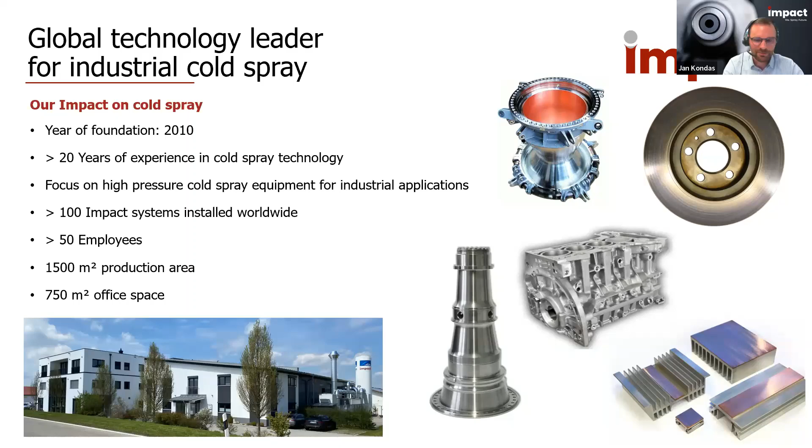So let me first shortly introduce Impact Innovation. For those who don't know our company, we are a German cold spray equipment manufacturer focusing on high pressure cold spray systems for industrial application. The company was founded in 2010, but many of the employees have longer, more than 20 years experience with cold spray. We've installed more than 100 cold spray systems worldwide. Our headquarters is located about 60 kilometers east from Munich in Germany, with around 1,500 square meters of production area and 750 square meters of office space, where more than 50 people work daily on design, manufacturing of cold spray equipment, research and development, and application development for different cold spray applications.

From the more than 100 cold spray systems sold worldwide, about 50% are located in Europe, about a quarter in North America, and about a quarter in the Asia Pacific region. Most of the cold spray systems sold recently are used in industry, but there are still many systems sold in the past which are installed at industrial research or academic facilities. The main fields of impact cold spray system utilization are automotive industry, aerospace and space industry, electrical components, and household products, specifically inductive coatings or cookware.

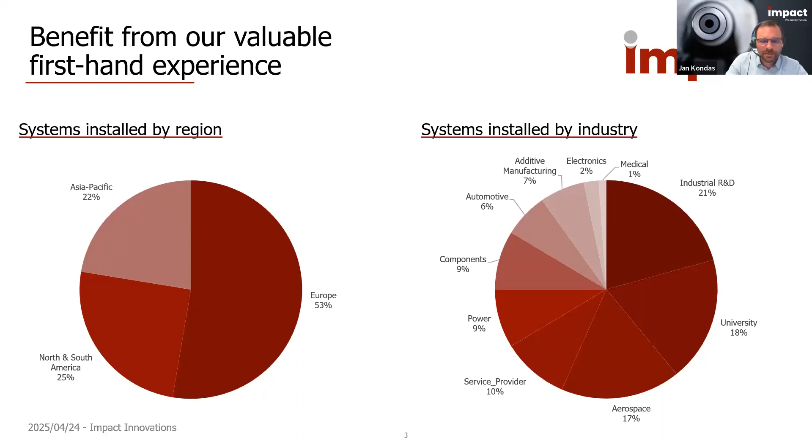Our in-house R&D facility, the spray laboratory, has more than 10 years of intensive experience in application development and material research. We have experience with a wide range of materials, most of which you can see in the table on the slide, but there are several others. We have experience with many alloys, metals, polymers, and some ceramics. You can see also a few photos from our material characterization laboratory and the spray lab.

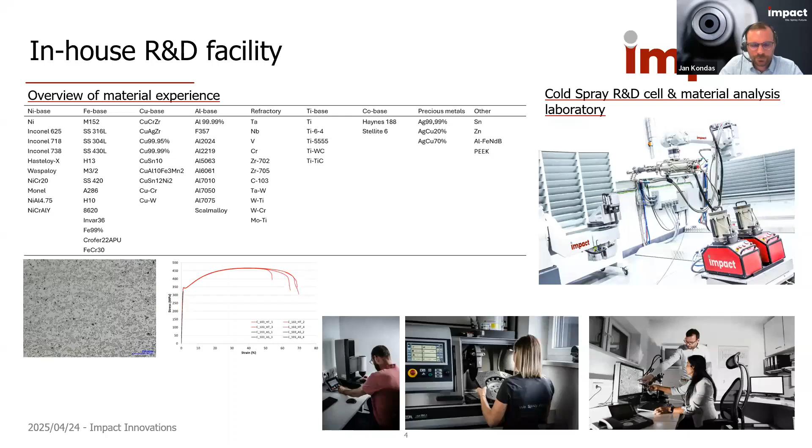First, I would like to introduce our EvoCSII cold spray system, which is a modular high-pressure cold spray system with a system architecture meeting the highest industrial standards. It is also convertible to a portable version together with the portable adapter, enabling operations at places with limited accessibility.

As Jan already said, in the new EvoCSII system generation, which we introduced in 2020, we are trying to follow a clear system architecture where we have a modular and flexible solution, especially for industrial use of 24/7 operation.

We have in this system a centralized control unit and gas management unit with a centralized control CPU. All external components like powder feeders, guns, water cooling units, powder heating, everything we call an external component, is connected to this centralized control unit, because we want to control all the external components from one control software and from one control CPU.

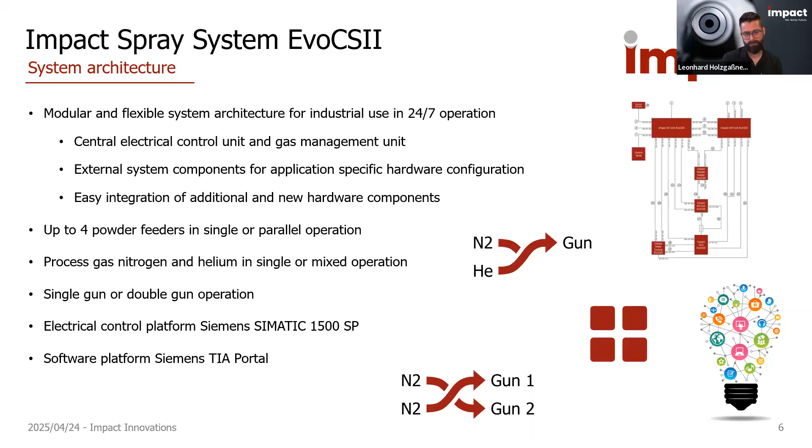We have just now introduced our new operating software called EvoOS, where we try to implement all the new standards necessary to fulfill all the requirements of the new IoT requirements. That means we have a central software to control all the components of the equipment, with an organic software architecture to integrate easily new upcoming software updates.

We have a very open interface to communicate with different other system components or automations. As I already said, we programmed this on a Siemens TIA Portal platform. And we have a new user interface, where we call it tile design, for a clear overview of all system components, with different component pop-ups where we have the detailed overview of the status of the different components.

At the moment we have 5 different operating modes, like manual control, external control, or recipe control. We have a centralized process value and process tolerance input. We have a very extensive monitoring system to monitor and control all the process parameters and the specific tolerances.

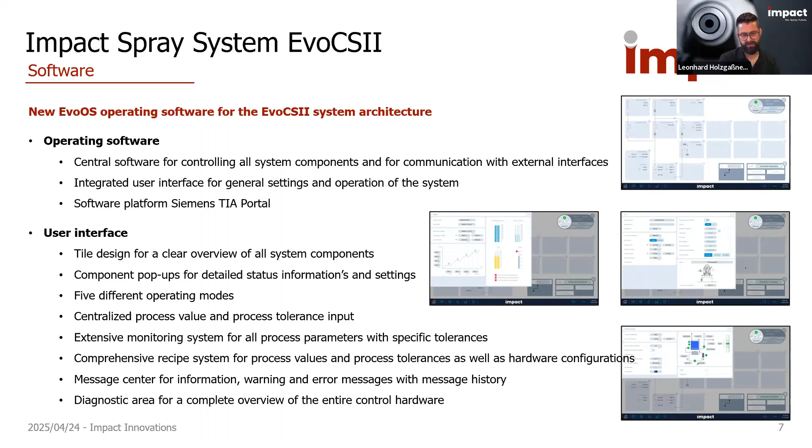I want to go a little bit more in detail on what we do with the process monitoring. First of all, we monitor every second more than 150 process values in a CSV file. That means we have a closed loop process control with all this data.

We can already offer preventive maintenance solutions, and we also invest a lot in machine learning to set up the full system for all the requirements of industrial 24/7 operation. What we have also implemented in this new software is cross-checking and the ratios between different process values, and if the ratio between the values is not in the right condition, we give the operator an alarm or a message.

The monitoring is carried out by specific defined tolerances, which can be set up in the recipe. With this we can also detect right from the beginning minor changes during production. That means we can already give quite early a message to the operator, for example, that in the next 1 or 2 hours you have to change the nozzle, or change something in the powder feeder.

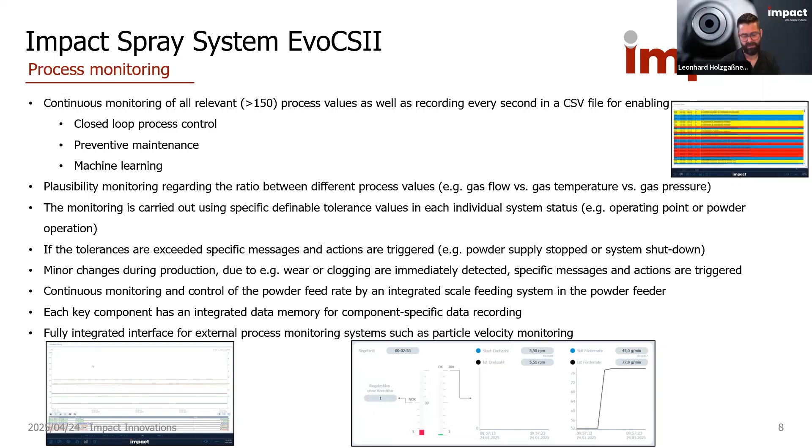On top of that, we have what we call a functional safety interface for safety-related integration into a high-level safety control system, like e-stop integration and enable signal integration. Then we have a seamless integration interface for external operation of the cold spray system by a high-level control production system. That means if you have a production line where you implement our cold spray equipment, you can fully control it by your higher-level control system.

As I said before, you have external recipe selection and external machine operation, transfer of system status and system messages. This is available for all common network protocols, for example Profinet, Profibus, Ethernet IP, CAN bus, everything that is available on the market.

As a third interface, we have an OPC-UA process data transfer interface. That means we can, in real time, transfer all the process relevant system parameters and data, for example to a SCADA system or to a server platform where I can then further process all this data.

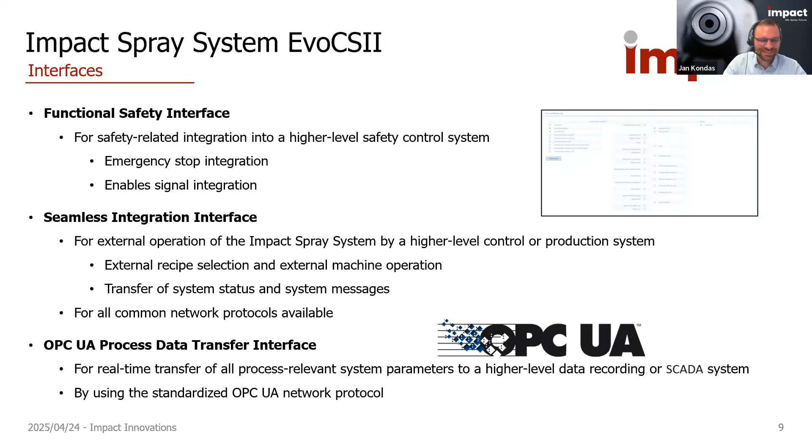I think, Jan, that's it, and I want to hand over. Thank you, Leo, thank you for the detailed explanation. I learned also something new from these few slides. I will not be as detailed in the next slides, I promise.

The Impact hybrid brake disc coating solution was selected as a preferred solution for the serial production of BMW M cars. So all BMW M cars in the future, I think starting from 2027, will have a coating on their brake discs from cold spray, from the Impact EvoCS systems.

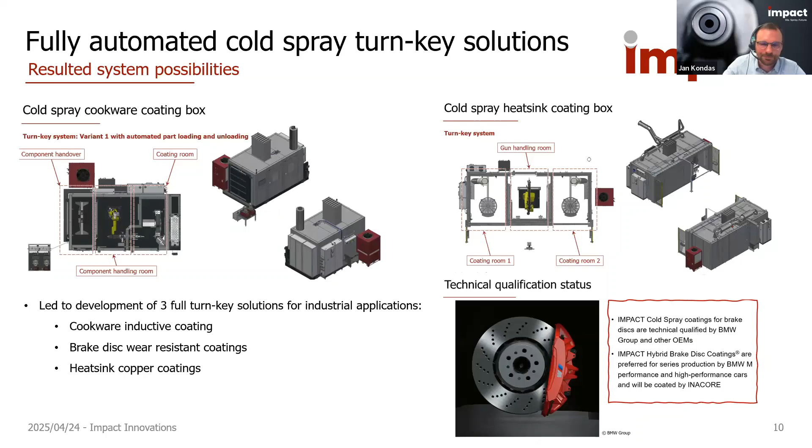As next, I will introduce our Impact cold spray gun family, which is the Impact Gun 5/8, the 6/11, and the 6/11 angle head version.

All three EvoCS generation guns have an improved water cooling design, and the main difference between the guns are the temperature and pressure capabilities. The 5.8 gun can go up to 50 bars process gas pressure and 800°C process gas temperature. The 6.11 and the 6.11 angle head can go up to 60 bars process gas pressure and 1100°C process gas temperature.

Both the 5.8 and 6.11 guns are available with radial and axial powder feeding, while the 6.11 guns are suitable to deposit the most challenging materials because they can handle the highest process gas temperatures and pressures, measured at the inlet point to the nozzle.

With this type of gun we can deposit the most challenging materials, like nickel-based superalloys, cobalt-based superalloys, titanium alloys, or some highly alloyed steels. As Lee already mentioned, all EvoCS guns have digital sensor technology for extensive diagnostics and component-specific data recording.

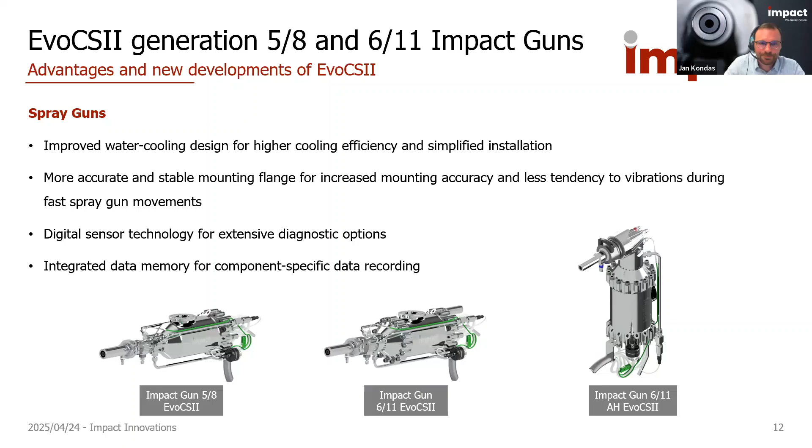A little bit more detail on the 6.11 angle head gun: this enables axial powder injection at a different injection point and maximum process gas temperature, with a specifically designed cooling concept. That's the difference between the standard 6.11 and the angle head 6.11 guns.

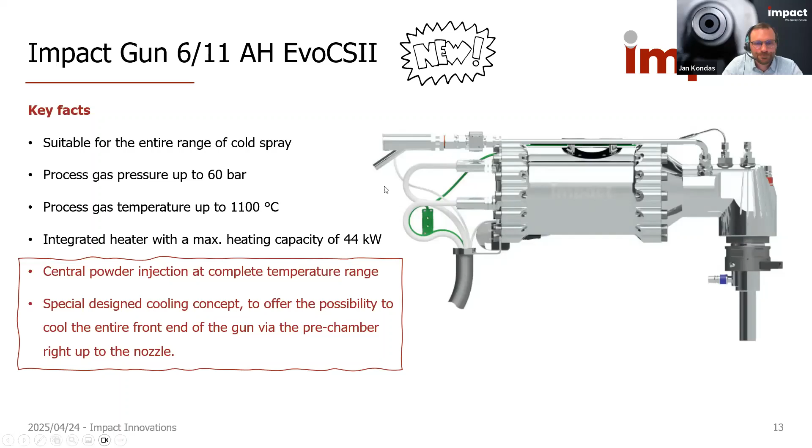For those not familiar with the concept, the pre-chambers are the components elongating the distance between the powder injection point and the nozzle inlet. So the powder is traveling in the hot process gas and has a chance to preheat a little, and therefore, upon impact at higher temperature for materials which are not oxidizing, this leads to better particle deformation and better quality of the deposit.

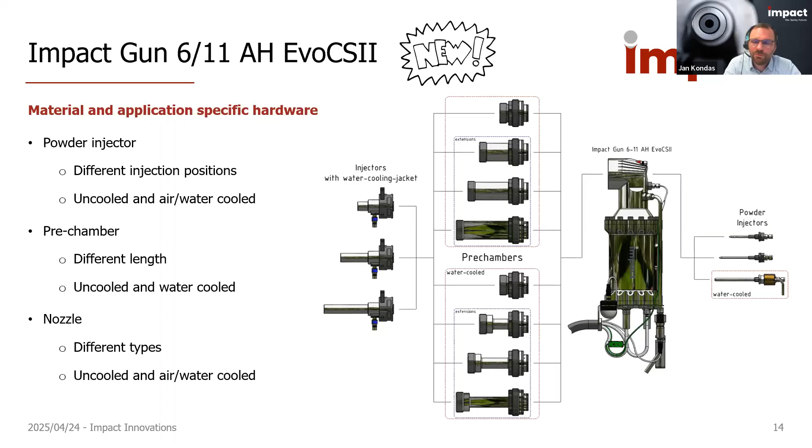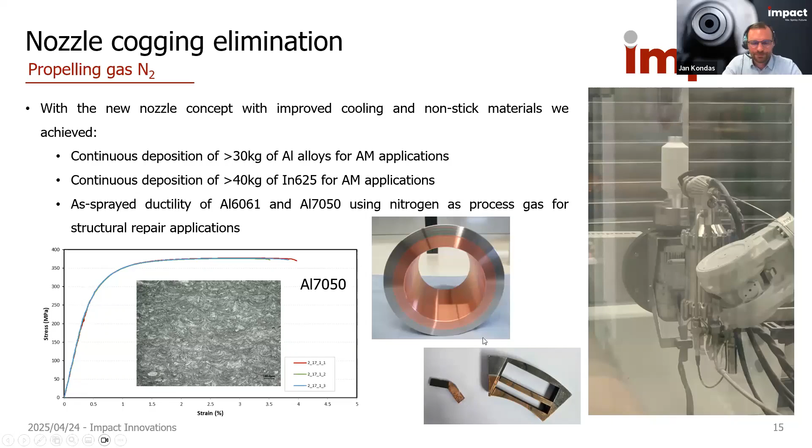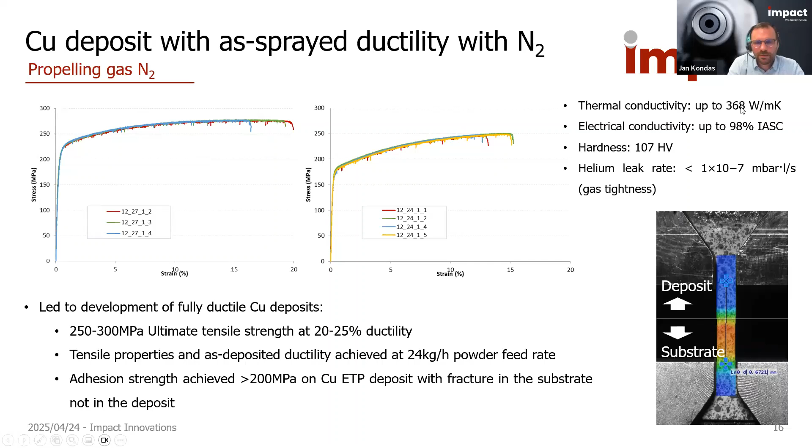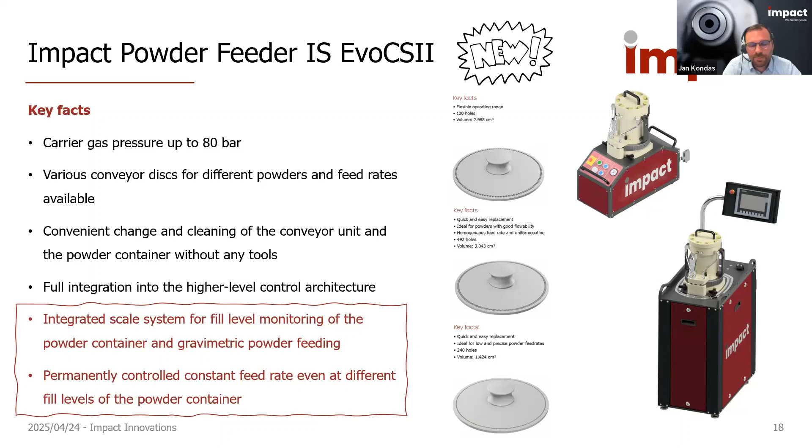The powder containers, which is this part on the top, are removable, and you can, without any tooling, easily exchange the powders inside, and clean the powder feeders or refill them without using any tool. There are different types of powder feeding discs, as you can see in the middle of the image, for thin uniform layer deposition or for high throughput powder feeding. The latest introduced powder feeder has a gravimetric powder feeding system, on the right side, with permanent powder feed rate control to ensure constant powder feeding at different fill levels. Powder containers with lifting guides and optional lifting tongs for ergonomic handling are available.

The powder feeders can be used in single mode, dual mode or a quadruple configuration, where they can feed one cold spray gun or two cold spray guns, and both the volumetric feeding version and the gravimetric feeding version are available. From these multiple powder feeders, it's possible to deposit also mixtures of different materials. For example, in our R&D facility, we are extensively using multiple powder feeders with multiple exchangeable powder containers or hoppers. So when we are testing different powders, different materials, different alloys, or different powder PSD, we can do all the tests after each other, just switching between the powder feeders and depositing different samples.

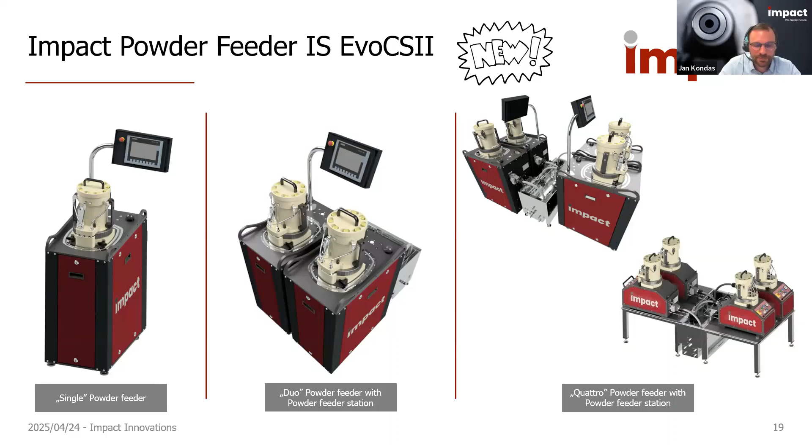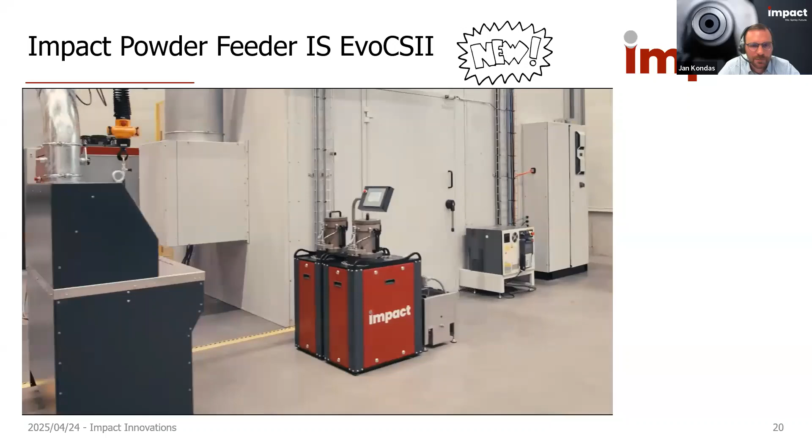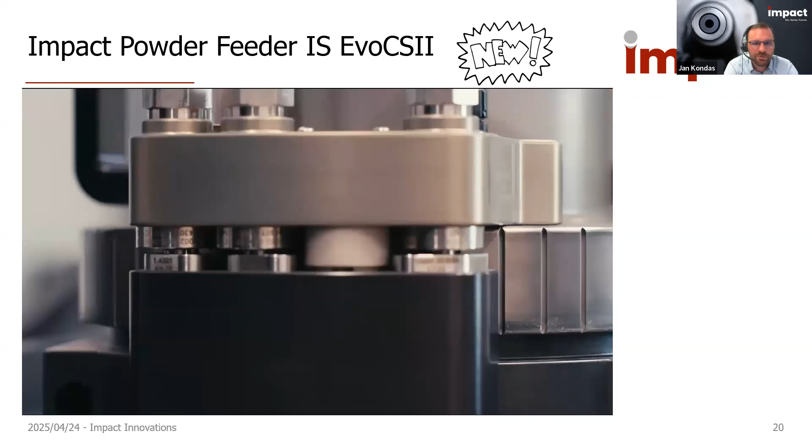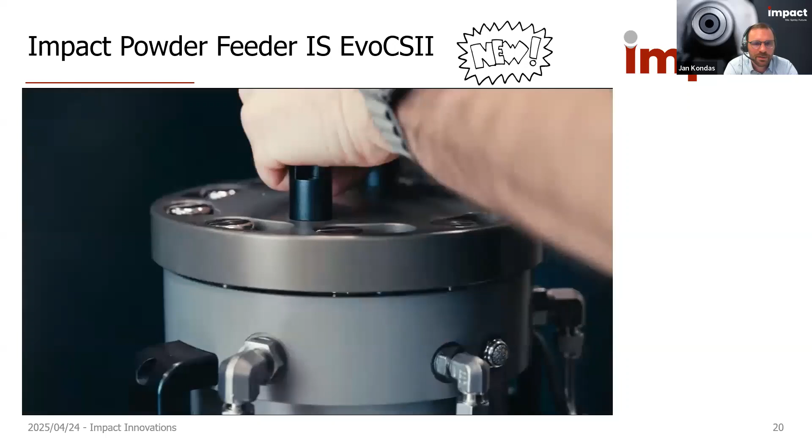You can see in this short video how the powder feeders can be operated on an industrial scale. This is one of the turnkey solutions. So you can see the screen directly on the powder feeder, then manually just pulling out the sticks you can remove the powder container. The container itself is about 20 kilograms, so we are operating this manually, but you can also use this lifting device to move the container to a cleaning station where you can by hand open the powder feeder and pour out the remaining powder if you want to change the material.

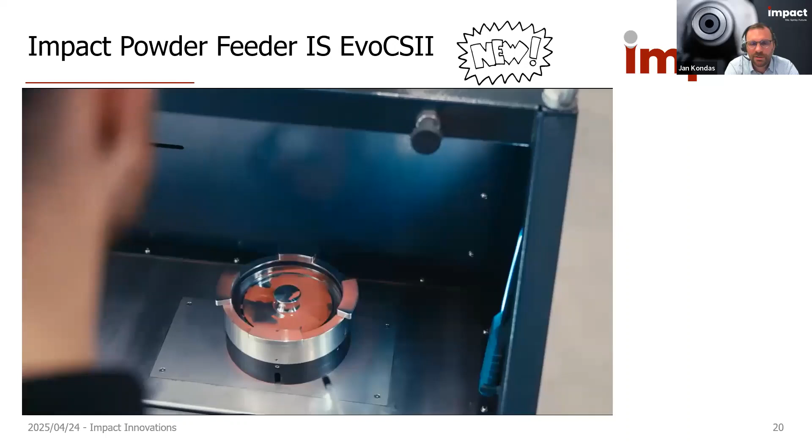You can also simply disassemble the powder container by hand, blow out the remaining material from the container, fill in the new powder, close the lid, and put it back. Or you can just have more containers and, replacing the containers after each other, you can just test different materials. Yes.

The unique powder feeding concept also allows us to feed materials at very high powder feed rates in industrial serial production, which is utilized in the case of heat sinks or electrical components, leading to unique deposition properties. I also want to show a short video about the speed of the deposition. So this is a 3 times accelerated video depositing a copper ring on a steel substrate. As you can see, the powder feed rate is 358 grams per minute, so 21.5 kilograms per hour.

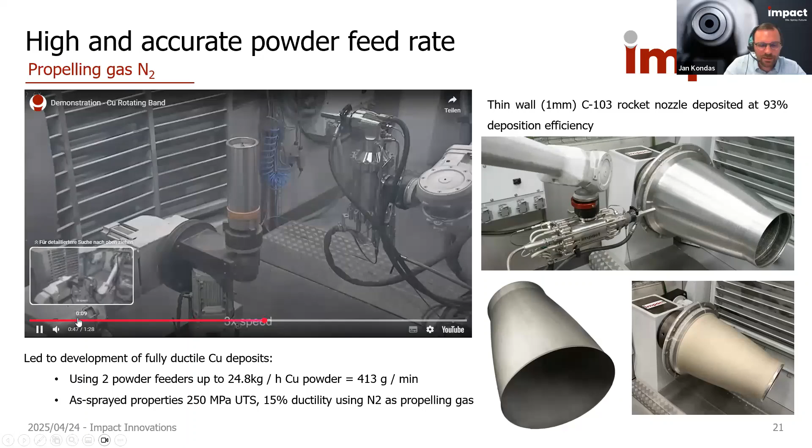The efficiency of copper deposition is 98% plus. And also we are achieving mechanical properties of these deposits, as I already showed before, 250 megapascal strength. So 620 grams deposited in 1 minute 45 seconds. Yes, so basically it's a 3 times speeded up video. Then of course this is a fully machinable deposit.

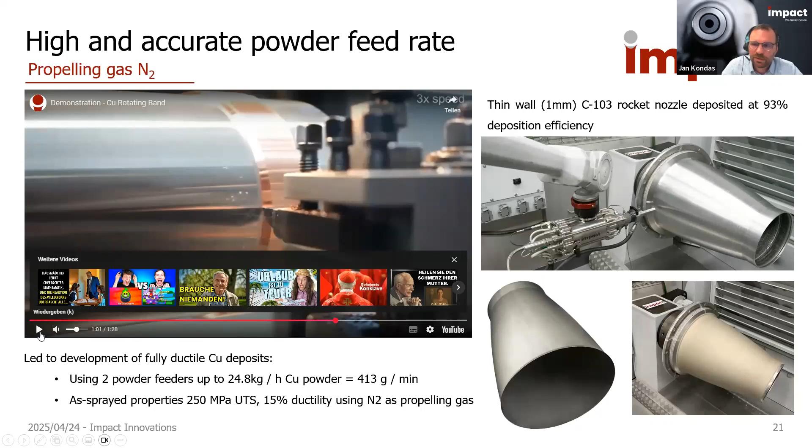Also this very accurate uniform powder feeding, on the right side you can see a deposition of columbium C103. It's a niobium alloy used for rocket nozzles, where we manufactured the demonstrator with a wall thickness of 1 millimeter. So an aluminum mandrel was used, then deposited in a 1 millimeter thick deposit, enlarged thickness at the flange, at the throat of the nozzle, and then the aluminum mandrel was removed by chemical dissolution. So this very uniform feeding system allows us to do very thin and very uniform deposits as well.

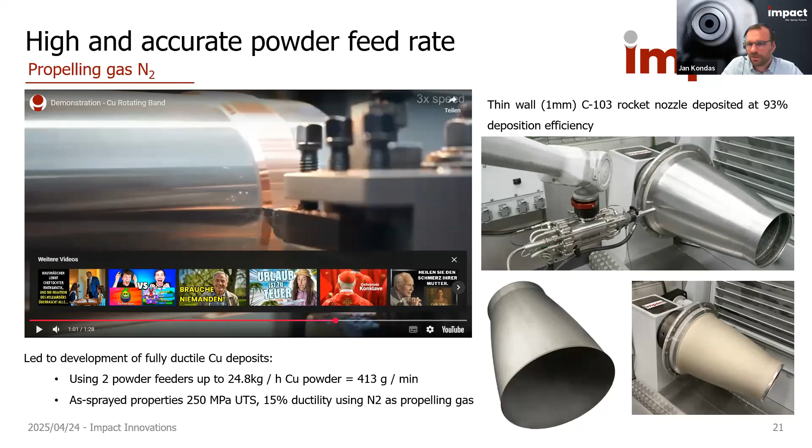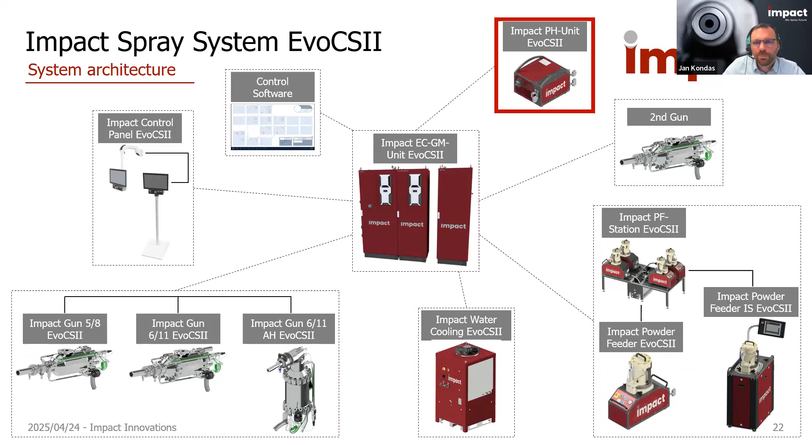Next, I will introduce our EvoCSII powder preheating unit, which is an external component increasing the powder particle temperature in the inert gas stream, which results in better particle deformation and hence better properties of the material. This you can see on the top as an external component here.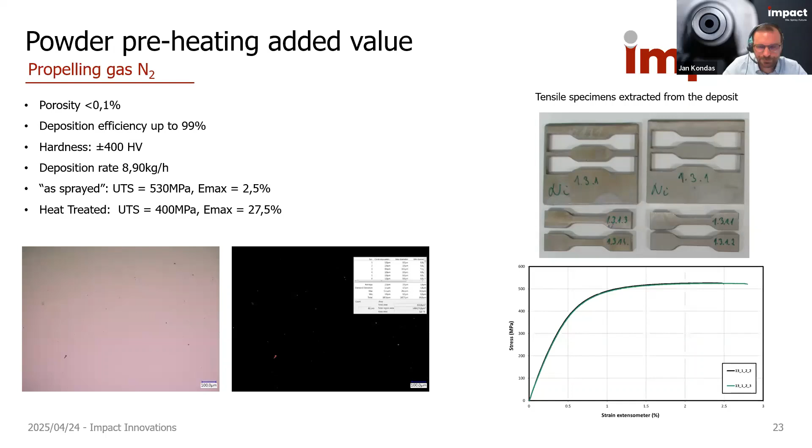This setup we are widely using for aluminum repair application development, and with this we also deposited materials showing as-sprayed ductility and bulk-like properties in the case of aluminum using nitrogen as process gas.